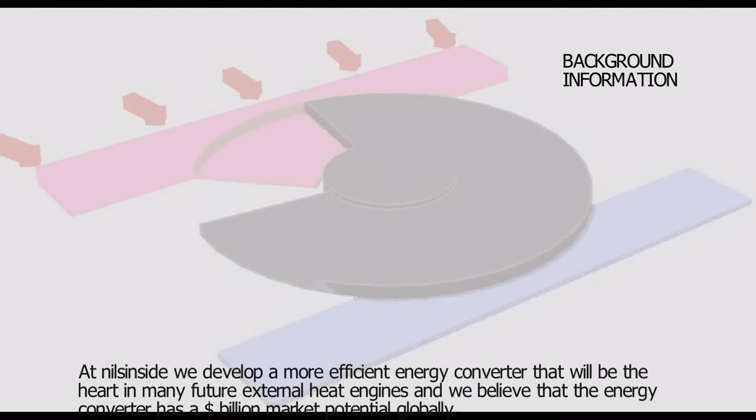At nilsinside, we develop a more efficient energy converter that will be the heart in many future external heat engines, and we believe the energy converter has a $1 billion market potential globally.

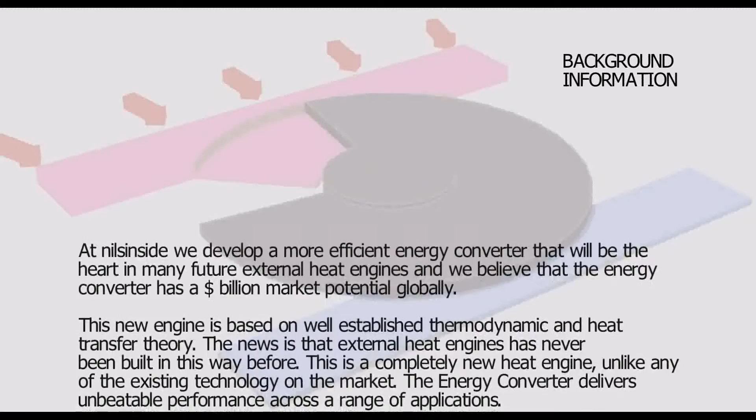This new engine is based on well-established thermodynamic and heat transfer theory. The news is that external heat engines have never been built in this way before. This is a completely new heat engine, unlike any existing technology on the market. The energy converter delivers unbeatable performance across a range of applications.

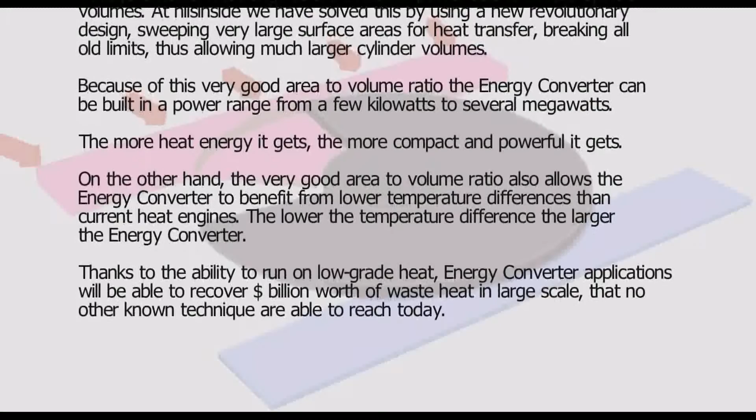Today's external heat engines are limited in power due to limited cylinder volumes. At nilsinside, we have solved this by using a revolutionary design, sweeping very large surface areas for heat transfer, breaking all old limits, and allowing much larger cylinder volumes, that is, much more power. Because of this very good area to volume ratio, the energy converter can be built in a power range of a few kilowatts to several megawatts. The more heat energy it gets, the more compact and powerful it gets.

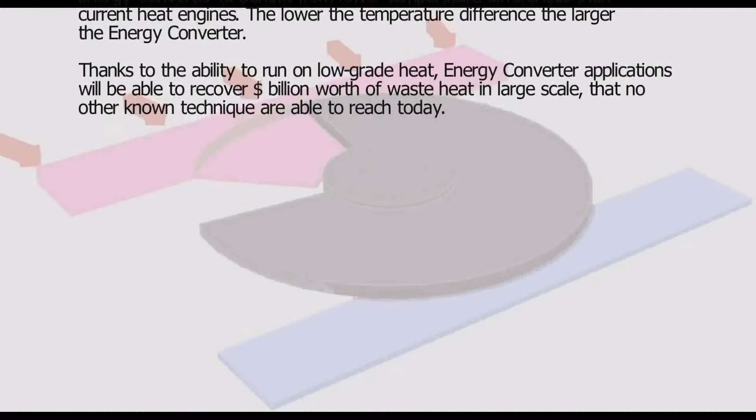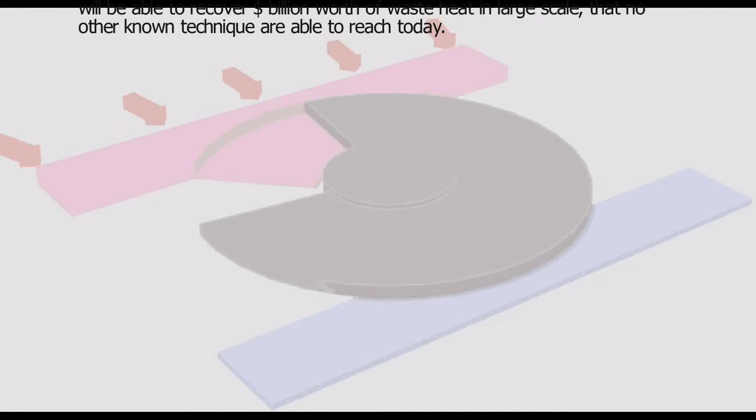On the other hand, the very good area to volume ratio also allows the energy converter to benefit from lower temperature differences than current heat engines. The lower the temperature difference, the larger the energy converter. Thanks to the ability to run on low-grade heat, energy converter applications will be able to recover $1 billion worth of waste heat at a large scale that no other known technique is able to reach today.

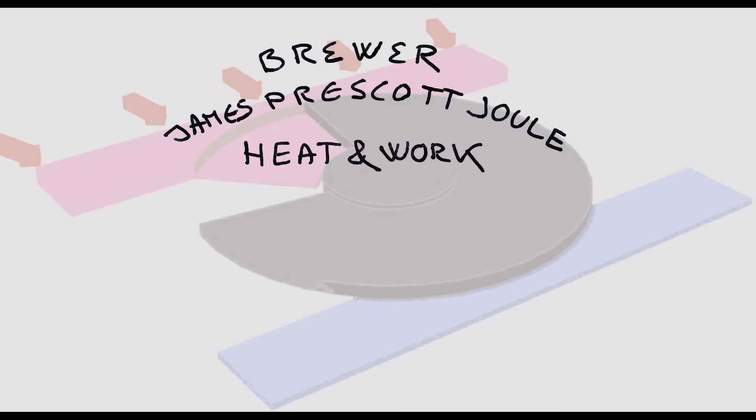Joule found that heat and work are related. Both are forms of energy, and today they have the same unit, joule, J. Energy is the ability to do work. A heat engine converts heat energy to work. The amount of energy does not increase or decrease during the transfer, it only changes from one form into another. In this case, heat energy to kinetic energy, and not all of the heat is changed into work.

In a waste heat example, we will look at an energy converter configuration from a theoretical perspective, converting waste heat to electric power. Starting with questions, we will identify important parameters that we will relate to some proportionality statements. When this is done, we will continue with formulas and finally set a chain of equations to calculate how much power we may convert from a certain waste heat source, and put it all in a spreadsheet so we can present this in tables and diagrams.

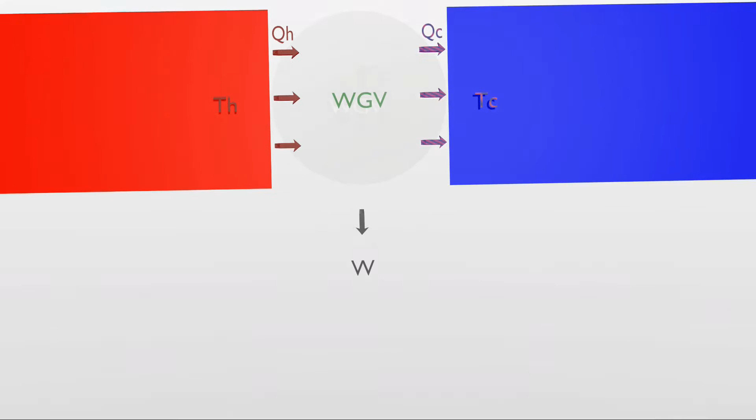The waste heat example. The energy converter transfers heat energy to pressure pulses that we may use to produce work in one way or another. An electric motor controls the rotation of a working volume in a shutter between a warmer source and a cooler sink during the transfer. How to use the resulting alternating pressure to generate work is left open to an infinite number of possible applications.

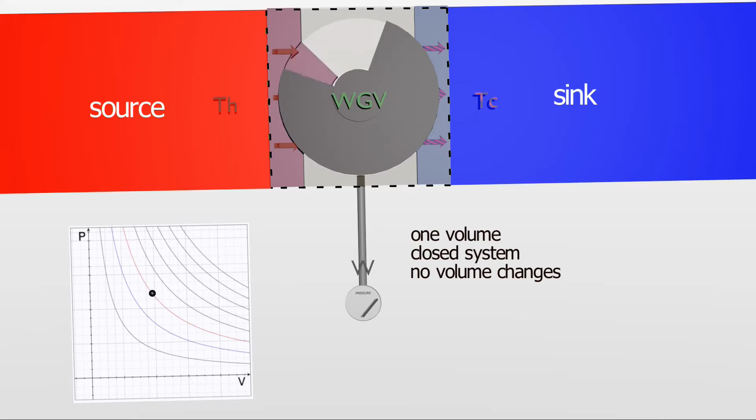You may think of it in the same way as a steam boiler that generates a vapor pressure that may be used in different ways to generate work, that is, connecting a piston engine, a turbine, or a pump, etc. A steam boiler gives you several options to generate work as kinetic energy. In this respect, the energy converter may be compared with a steam boiler. They are both parts of an energy system that provides several options to generate work.

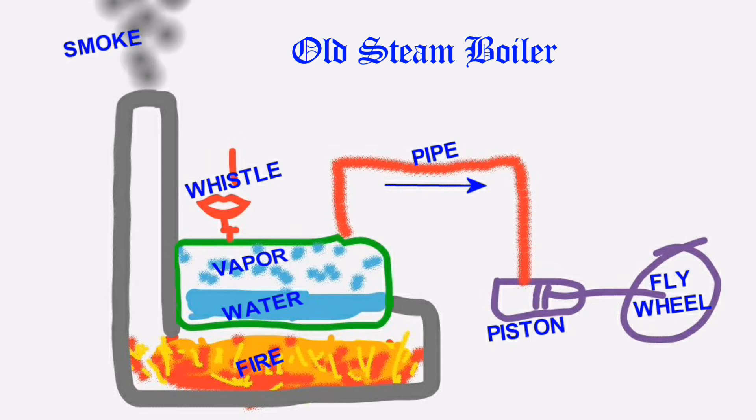Important differences are that the energy converter delivers a ready-made alternating pressure instead of the old boiler's one-way pressure, and the energy converter is not limited to steam.

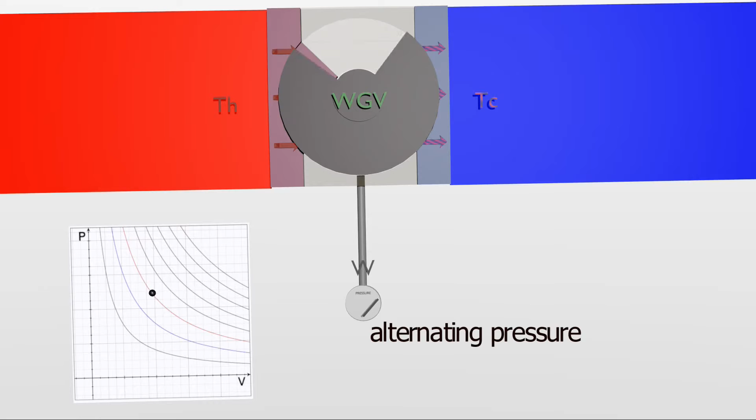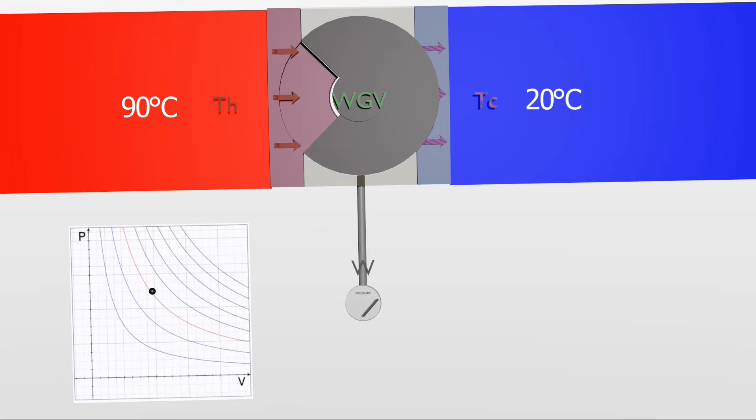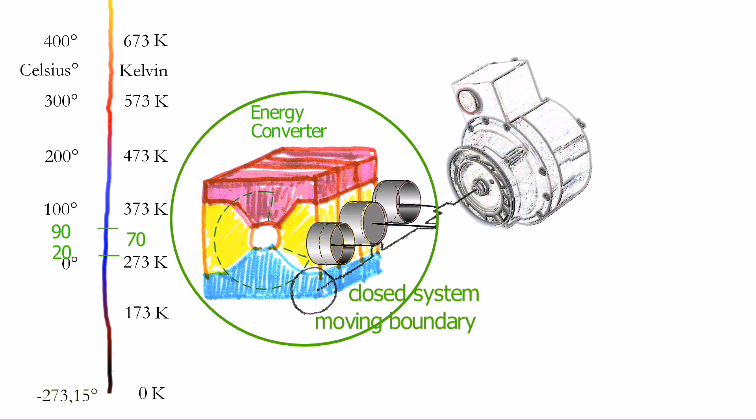Is waste heat recovery a potential application? We will look at waste heat with an almost infinite temperature of 90 degrees Celsius and a sink at 20 degrees Celsius, and we will use pistons to convert the alternating pressure pulses into kinetic energy to turn a generator. In thermodynamic terms, the energy converter acts as a closed system with a moving boundary that transforms an existing given temperature difference into rotation by means of pistons on a shaft, and this system in turn connects to an electric generator.

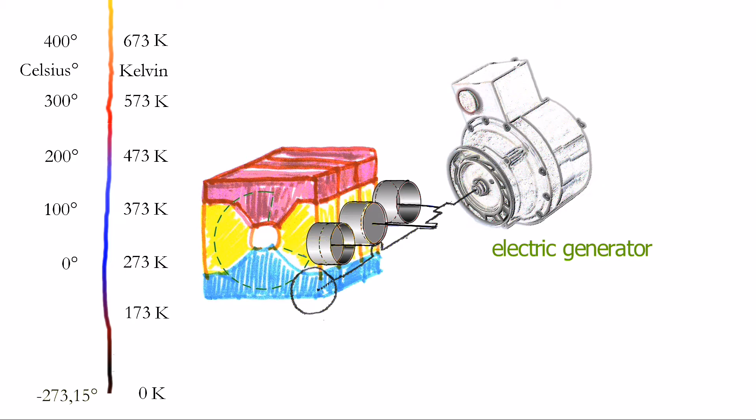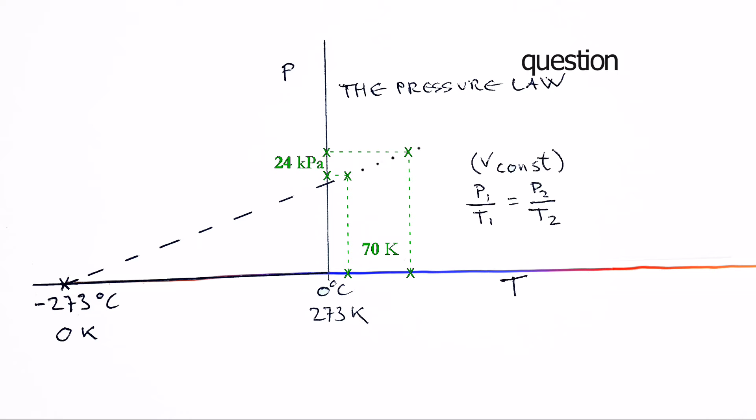But is it really possible to use a low-grade waste heat source to produce an important power output? Important questions: with an ideal gas as a fluid in a working volume, a low temperature difference always gives a corresponding low pressure, no matter how much volume we have. How are we going to get large quantities of energy from so-called low-grade heat? If more volume does not generate more pressure, why do we need a large working volume? But changing the temperature in large volumes is a time-consuming process.

How are we going to heat up a large fluid working volume with heat from a solid magazine with a low difference in temperature between the magazine and the working volume? And how do we cool down the working volume fast enough when in contact with the sink?

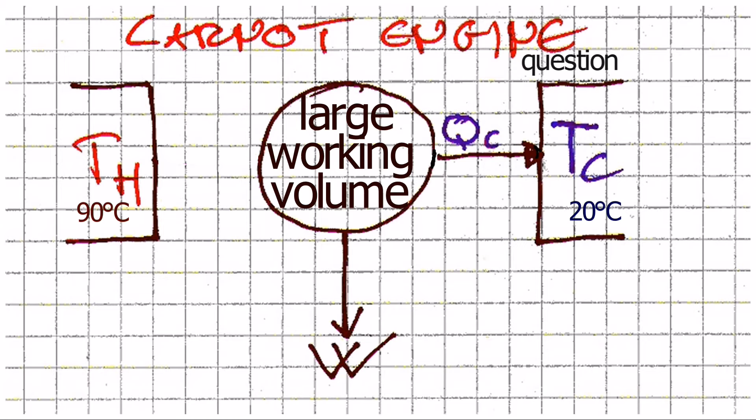Also, choice of working fluid has an influence on power output. Is there a choice of gas working fluid that works in most applications? Is a phase shift in the working fluid a possibility? Under what circumstances do we gain power on a phase transition?

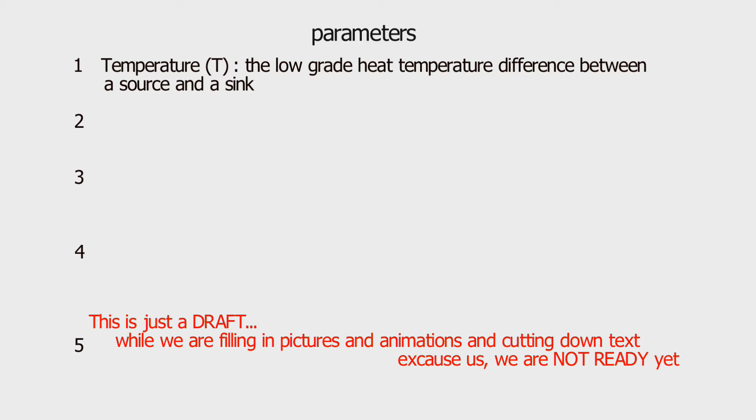With these questions, we have already identified important parameters. Temperature, uppercase T: the low-grade heat temperature difference between a source and a sink. Pressure, lowercase p: the low-grade heat results in a mild pressure pulse.

Volume V: our working volume will apply its pressure change to a solid area like a piston, a closed system with a moving boundary. Surface A: the low-grade heat is transferred from the source via a convector area into the working volume. The working volume fluid expands.

Next step, the working volume fluid retracts while its heat is disposed via the convector surface area into the sink. Time, lowercase t: how many pulses we get over time will help us to calculate the power. We will tackle our waste heat recovery example in 3 steps.

Step 1. Uppercase T, lowercase p, V, with the chapter Volume for Power. A closed system consisting of an ideal gas as a working volume and a moving boundary like a piston was fully elaborated, understood and documented by Carnot, Clapeyron and Clausius already in the mid-1800s. So today we have a solid theory and proven formulas explaining the interaction of the first 3 parameters: temperature T, pressure P and volume V.

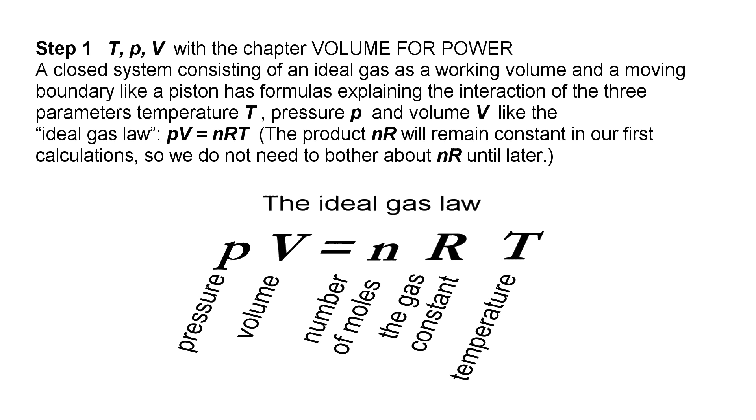Like the ideal gas law, P times V equals nRT. The product nR will remain constant in our first calculations, so we do not need to bother about them until later.

Step 2. A, lowercase t, with chapter Surface for Heat Transfer. To understand how to heat up and cool down a large working volume as fast as possible is a question of surface area A and time, lowercase t. We will look at Newton's law of cooling to get an idea on how surface and time relates in heat transfer.

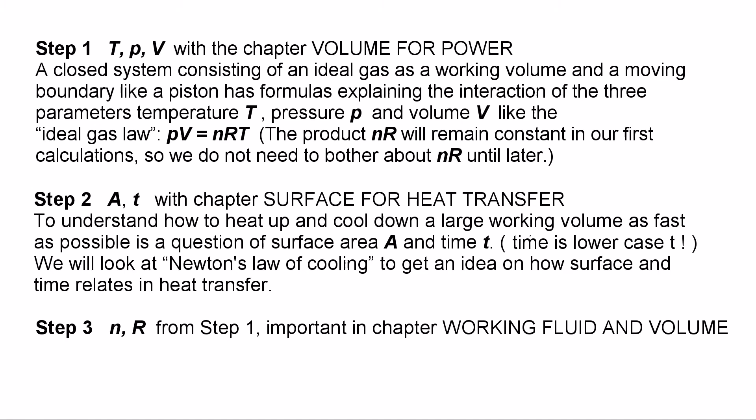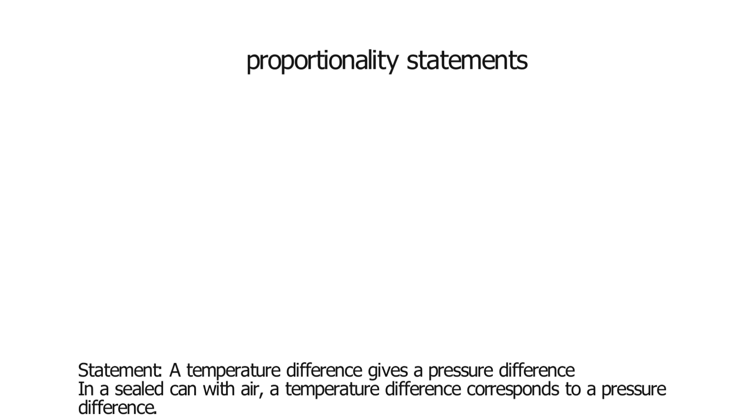Step 3. N, R, mentioned in step 1, are important in chapter Working Fluid and Volume. We have proportionality statements that will help us to understand how it all relates and how it works. These give an overview of the problem before looking into formulas and equations to get specific values.

Statement: a temperature difference gives a pressure difference. In a sealed can with air, a temperature difference corresponds to a pressure difference.

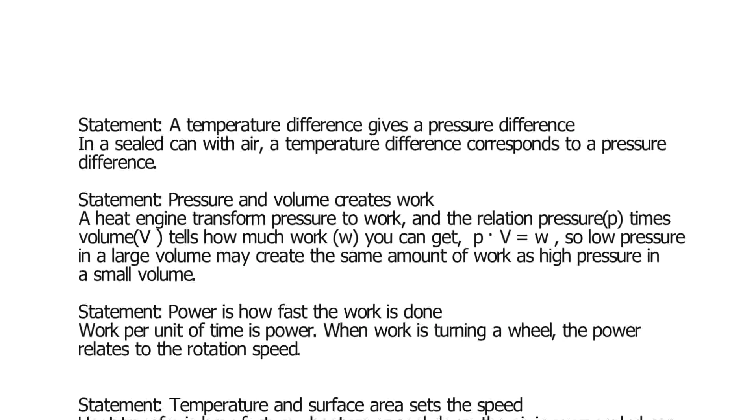Statement: pressure and volume creates work. A heat engine transforms pressure to work. And the relation pressure, lowercase p, times volume, V, tells how much work W you can get: lowercase p times V equals W. So low pressure in a large volume may create the same amount of work as high pressure in a small volume.

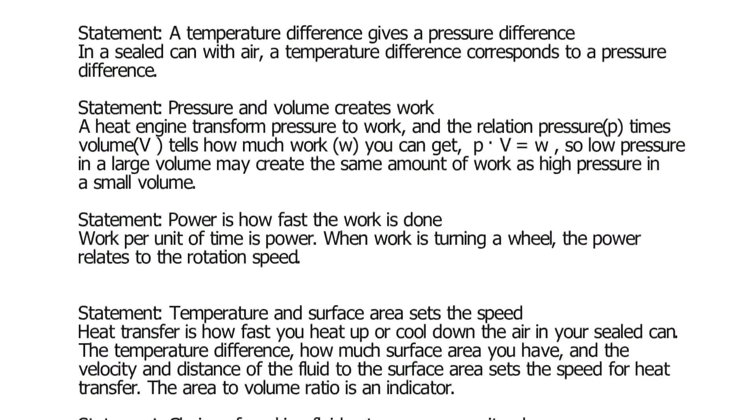Statement: power is how fast the work is done. Work per unit of time is power. When work is turning a wheel, the power relates to the rotation speed.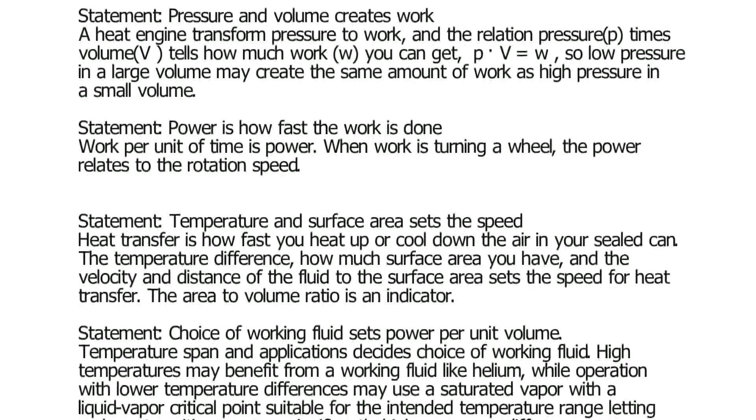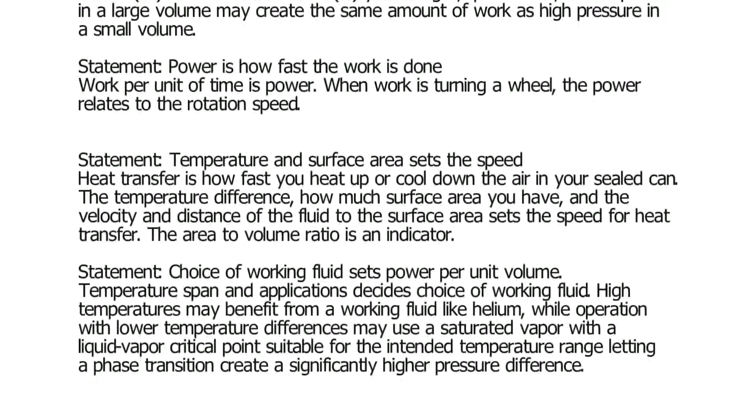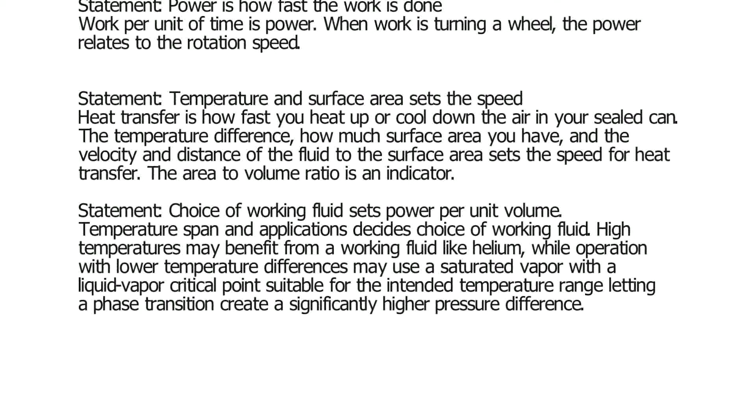Statement: temperature and surface area sets the speed. Heat transfer is how fast you heat up and cool down the air in your sealed can. The temperature difference, how much surface area you have, and the velocity and distance of the fluid to the surface area sets the speed for heat transfer. The area to volume ratio is an indicator.

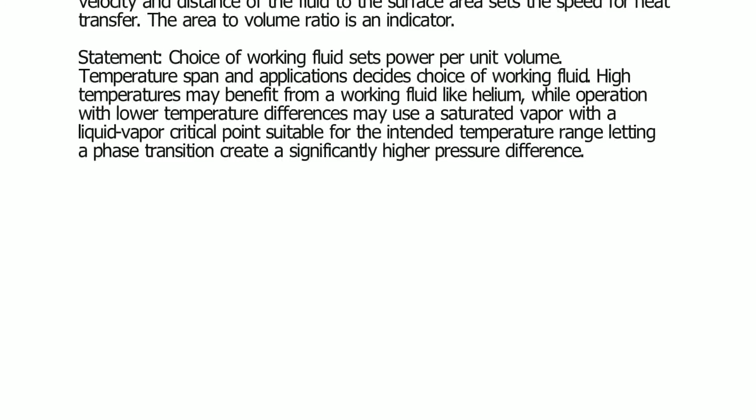Statement: choice of working fluid sets power per unit volume. Temperature span and application decides choice of working fluid. High temperatures may benefit from a working fluid like helium, while operation with lower temperature differences may use a saturated vapor with a liquid vapor critical point suitable for the intended temperature range, letting a phase transition create a significantly higher pressure difference.

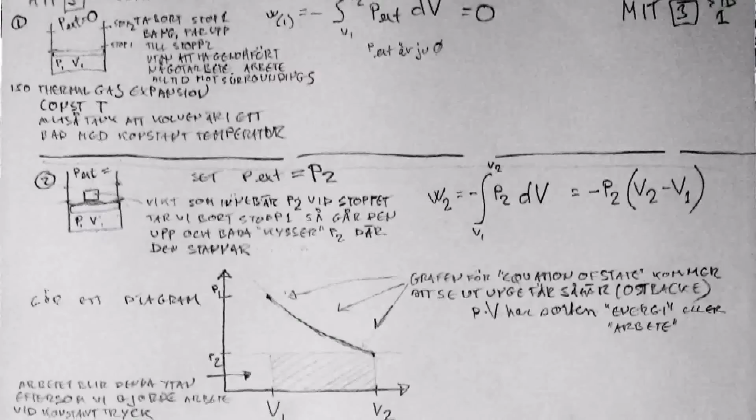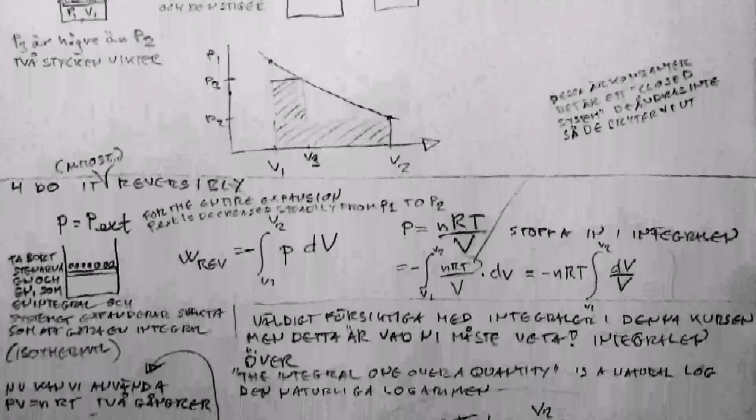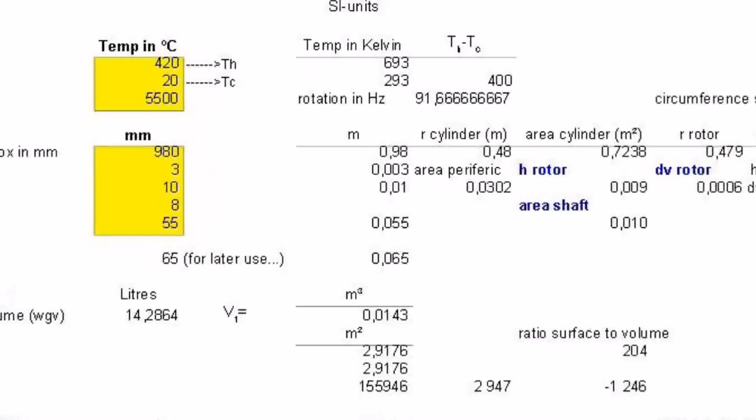Now you're introduced to the energy converter configured for a waste heat recovery in a theoretical perspective. Questions have revealed parameters to check with relevant proportionality statements. Now we are able to continue with formulas and equations to calculate how much power we may convert from a certain waste, and build a spreadsheet to present the profit in tables and diagrams. See you in next presentation, and thank you for watching.